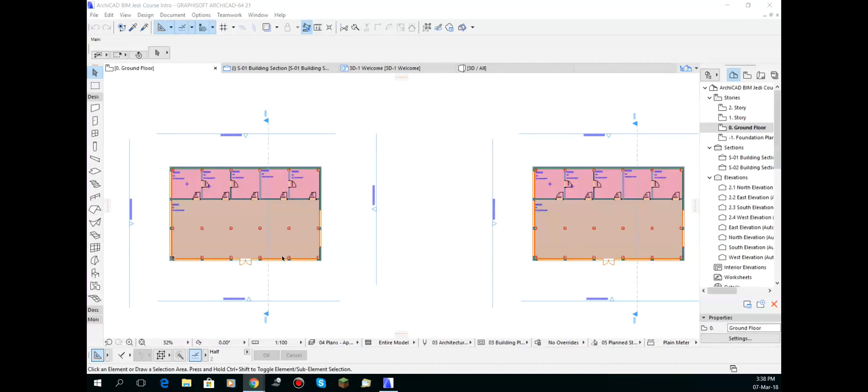So as you can see here, I have got the same floor plan repeated twice. The one on the left is done nice and cleanly. If we zoom up on it, you can see there, all nice and clean. The one on the right isn't so, but you wouldn't tell if you didn't know what you were looking for.

This one here, I have got some errors in the floor plan of only 1 millimeter, and you'll see later on just how much of a problem that can cause you, or how much extra work not taking the time to match that 1 millimeter up can cause you.

So if you look at these floor plans here, this one here and the previous one, you probably can't tell too much difference. But if we zoom up into the doors here, I have set this up so that the doors are picking up their label from the zones.

So this line of doors are picking up the door label, so the O1 here, from the room that it's going into. And on these ones here, I've experimented a little bit different and set up the door so that we open up the object so that it picks up the label and creates, what's on the other screen, there's a mouse pointer.

So in the latter here, it picks up the door label from the room that it's going into, as well as the zone that it's coming from. So close it off. And here you'll see that it's DO102, so it's coming from zone 01 to zone 02, and DO203 from 02 to 03.

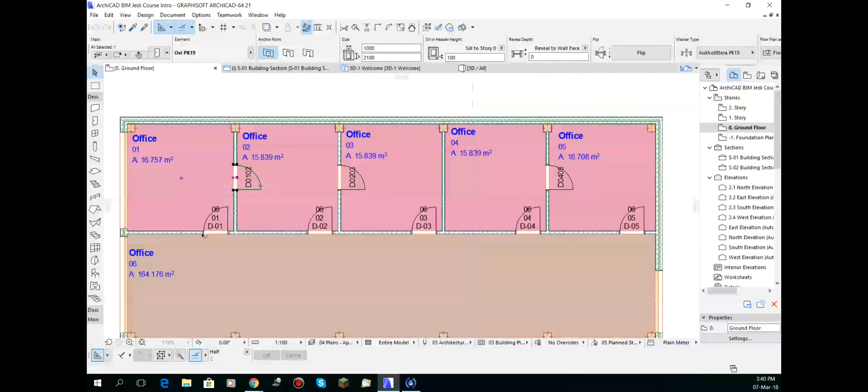This one here I've done quite a bit differently. We've given the door a label, its ID, as well as separate zone markings from where it's coming and where it's going. So you can see there it's picked all those up nice and cleanly.

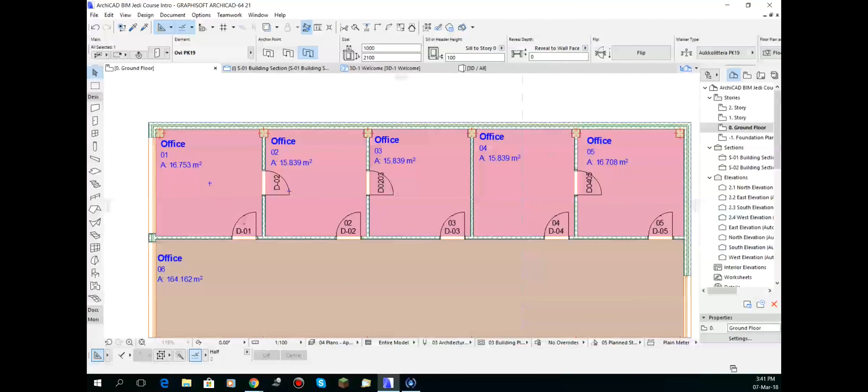But if we come across to this one here, because we are just 1 millimeter out, because we were in a hurry to model this one up, we had a deadline looming, it has missed out on some of the labeling on the doors.

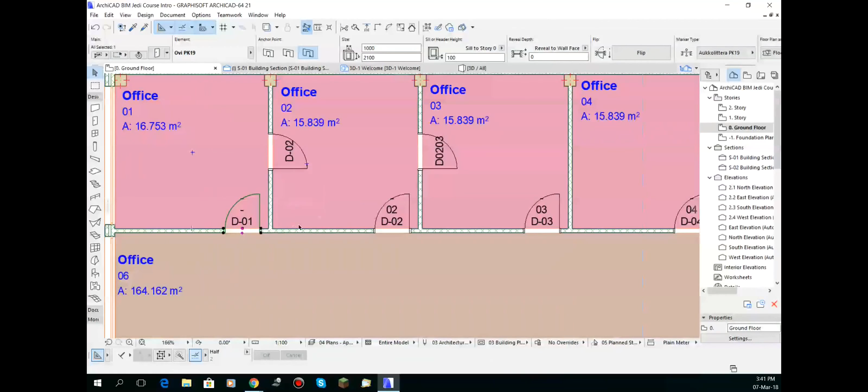Now we could go through and fix that up by labeling them manually if we really wanted to get it out in a hurry. But that means that every time we change something, maybe a zone number or something like that, then we have to remember that that door is being done differently and go through and fix it up. Or if we've done it on the whole project, we have to go through and do all of the doors manually.

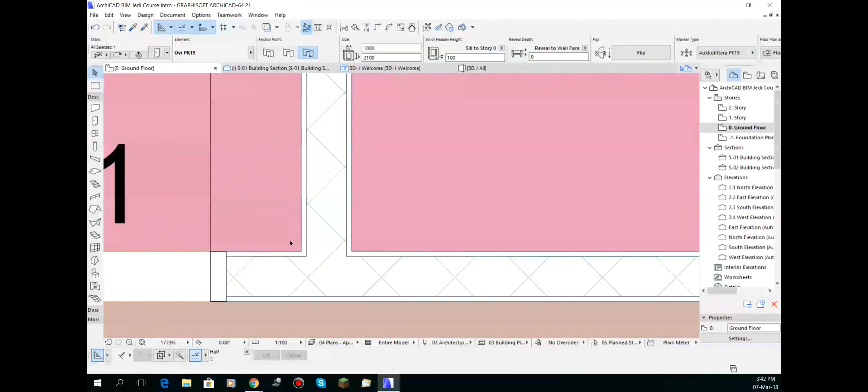So, yeah, by having taken the time to put our zones and line each zone up with the corner of the wall here, if we click on here, we can see that all of our points are nicely laid over each other there.

Yet if we come across to this side, I think it was... no, that one was all right. I think it was at the other end.

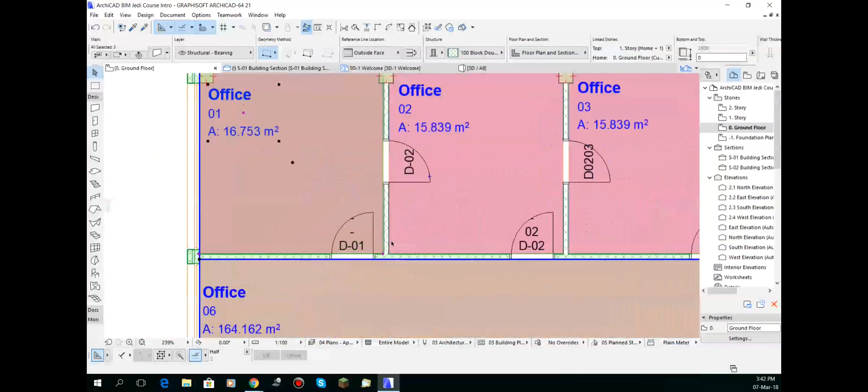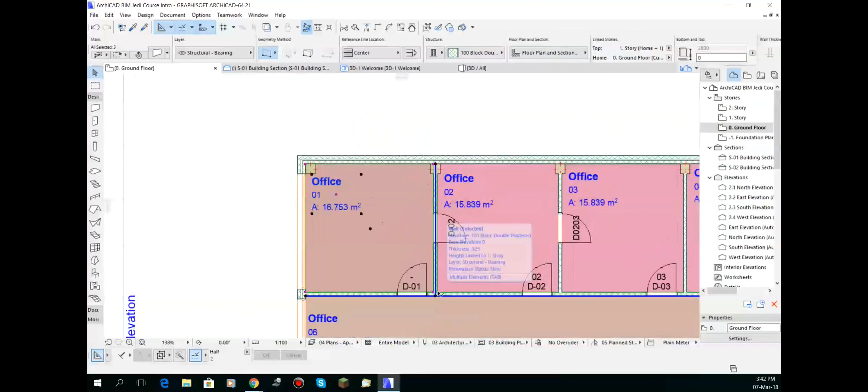This is how hard it is to pick up, but one of these points here is just a millimetre out because I didn't take the time to line it up with the tick mark in ArchiCAD. So when you're placing things like zones, it's a good idea to zoom up close sometimes and make sure that the tick mark comes up, because that means you've got the ready-made point. So rather than just coming close and banging your zone down, take the time to do that. So now that's how it works with the zones.

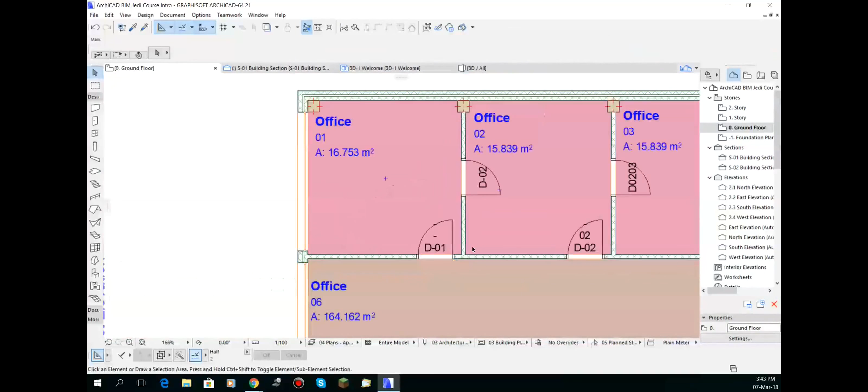Now if we go back across to the elevations, here we go, and the south elevation. There's a south elevation on one building, and here's the south elevation on the other building. You can't really tell much difference there, but one of these is just modeled raw out of ArchiCAD, and this one here is because I didn't take the time to match everything up.

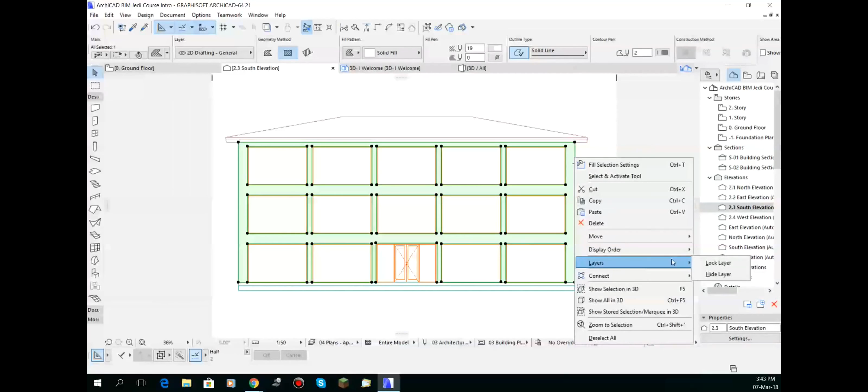I went through and did what we do quite often here, and that's put a fill over the outside so that we could hide all the messy line work. Now, if I hide that layer, we can actually see how ArchiCAD's modeled it up. These differences are only, as I say, 1 millimeter. So that's the sloppy model, and then this is raw ArchiCAD of the same building, just having taken that extra second of time to line everything up.

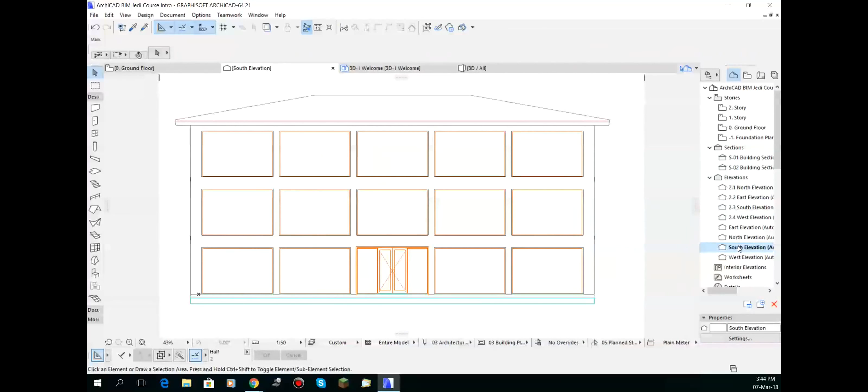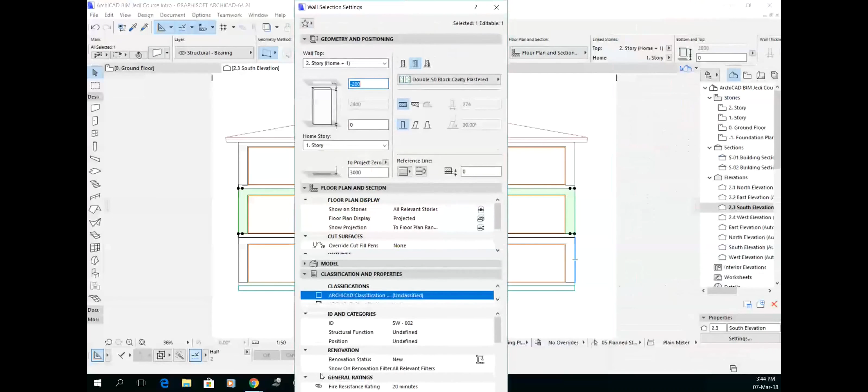Now, one other thing is, one of that one there is because ArchiCAD recognises the same materials and makes them all a solid surface. I've also, in this one, inadvertently put this as paint glossy white, whereas the walls are paint titanium white. So for ArchiCAD, that's different materials, so it's going to always delineate the two different elements.

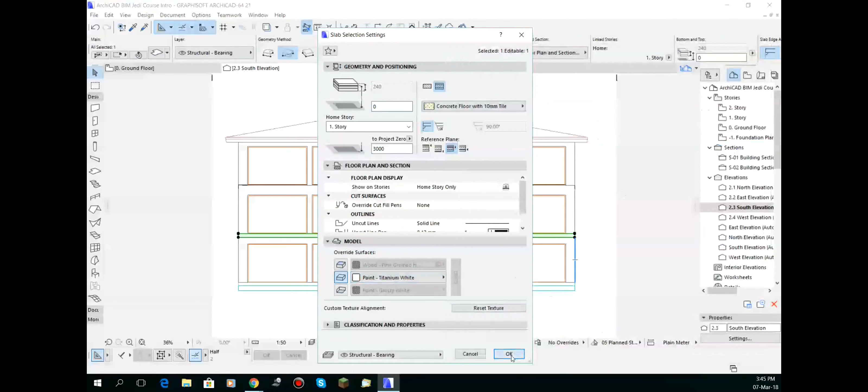So if I now go through, it's not going to fix it completely, but if I go through and change that to titanium white, it hasn't changed it there, but I think it's one of these other elevations that you would... yes, so it's just fixed it up here that the bottom one is in line, so it's recognised that this wall and this slab are the same material now. So if I was to undo that change and go back to the east elevation, it's recognising a separate material.

So yes, when we're modelling, it's a good idea to keep in mind what we're doing and how things are going to look at the end of the project, or at the end of the model, so that we can use the power of ArchiCAD to do our work for us.

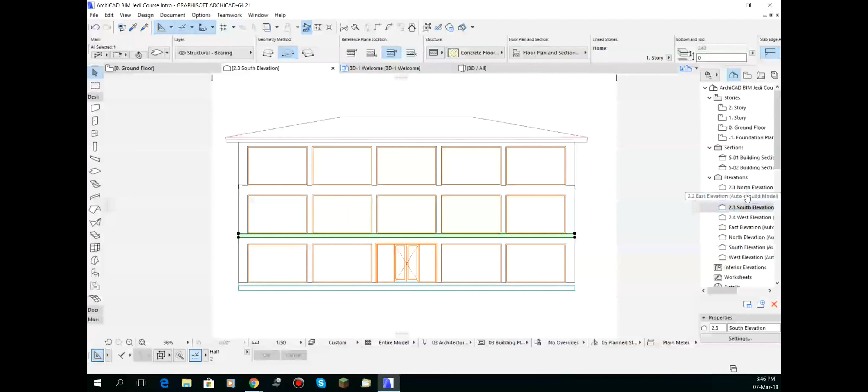Now, if we were to go back and say, okay, we've been in a hurry and we have done our fills, well, I'll turn that fill back on. Okay, so now that we've got our fill back on, this is all nice and clean. We've been in a hurry. We decided that we'll just go with the fill method.

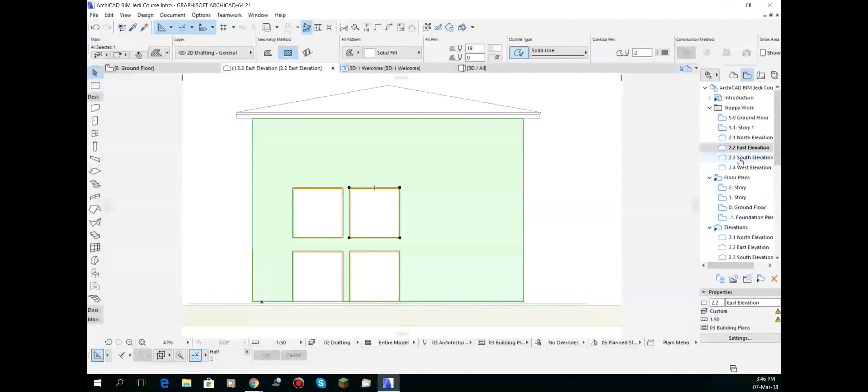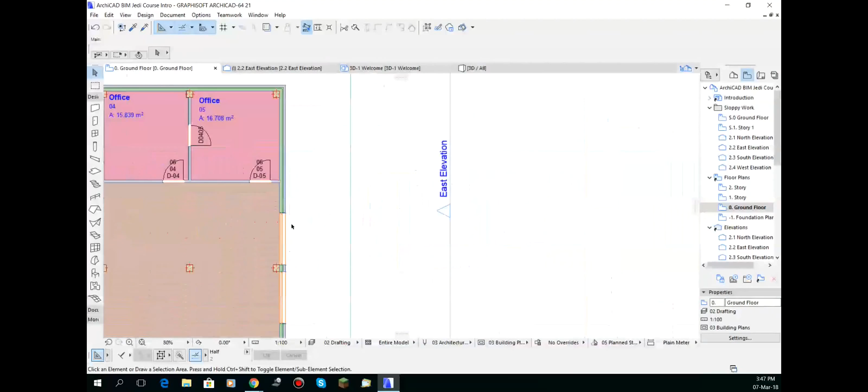Now we've decided that, hold on, all these windows are the wrong size. So if we go back to the ground floor, say, and we want to extend all the windows. So we'll do this there and pull this one here. And also we'll do that in the tidy model, so we'll stretch that out there and one there.

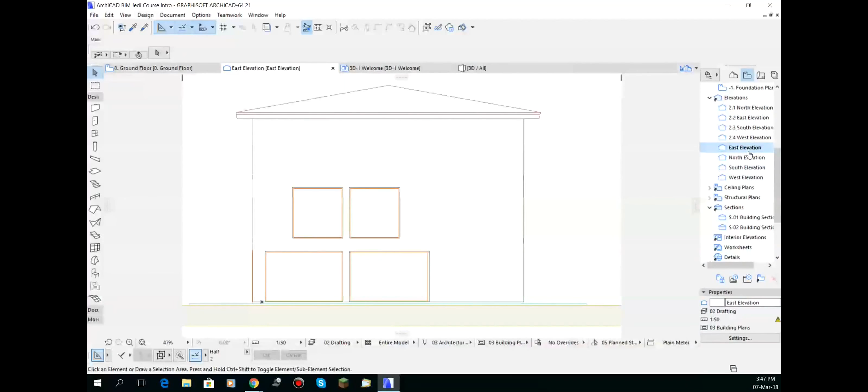Okay, so that is the east elevation. So if we go back to the east elevation, this is the sloppy model, but if we go back to this one here, okay, ArchiCAD's already tidied everything up for us. We haven't had to do a thing, but because we were in a hurry and we put the fill over on that one, it's still there.

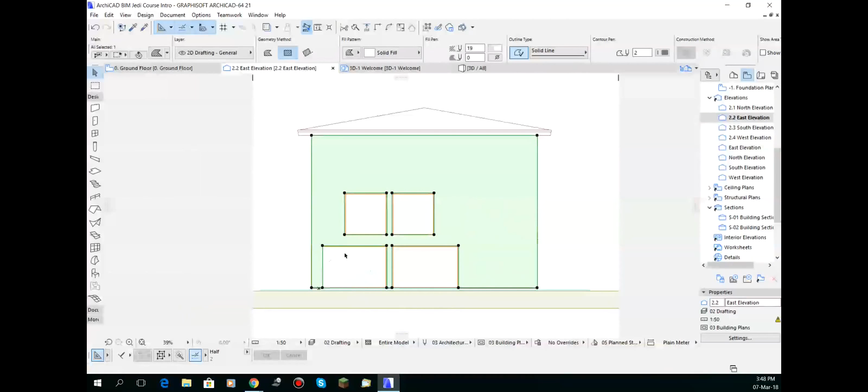So now, by trying to save time, we've now had to cause ourselves to go through and change this. So if we've changed 50 windows in that little elevation, say, that means we've got to go through and waste all that time fixing up our fill.

Go back. So basically that was today's sort of session on working smart, using those points.

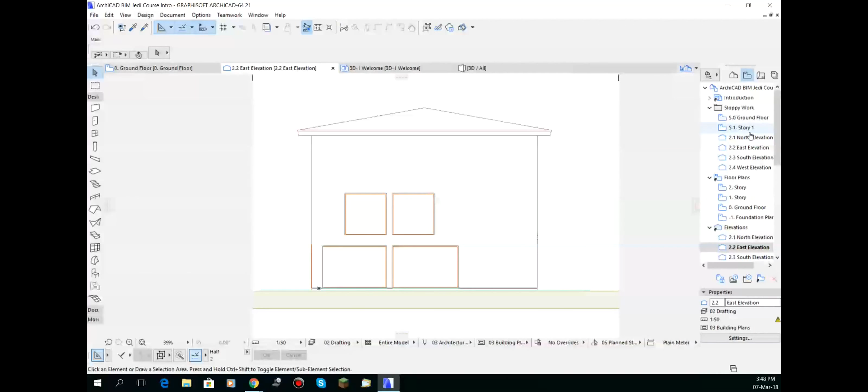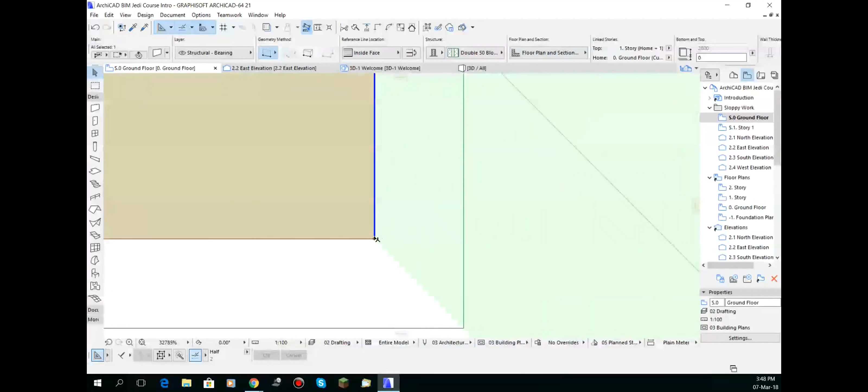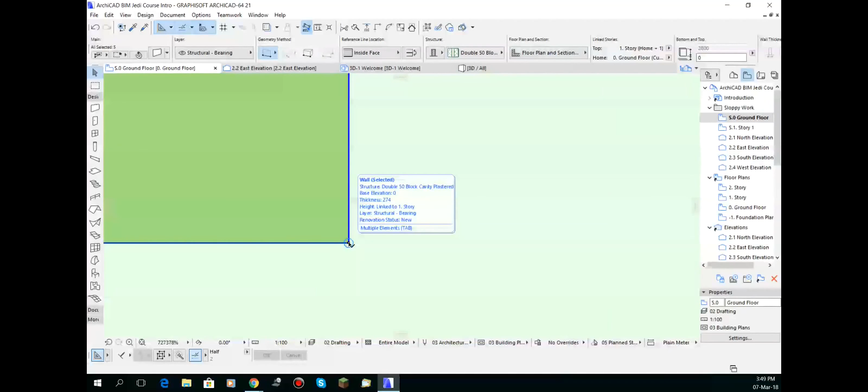Now, one thing I do is to actually quite often zoom up close when I'm doing my work to find where those points are, because sometimes you may have already placed something slightly out, and then you start placing stuff in all sorts of random places because, okay, the tick will still come up. If we go across to the other one, this tick will still come up, but there's 2 points in there that are very close together, but you can't quite tell. So by starting out smart and working smart right the way through, then we don't have to spend all the time later on trying to work around. We'll leave the workarounds for Revit, I think.